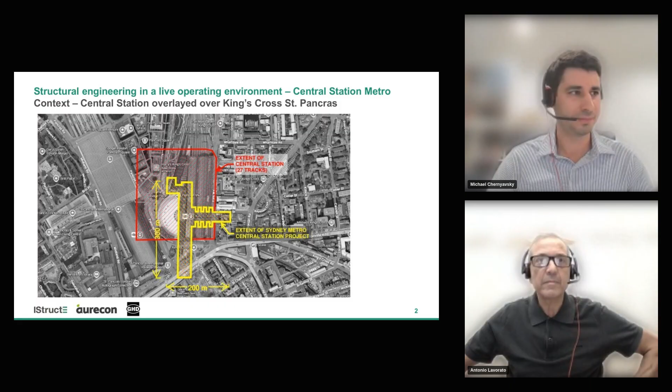We want to step you through some of the background, the challenges, and the process that informed our structural solution. Due to time, we have to limit the presentation to just a few of the many design packages for the various areas of the station. Firstly, an introduction to the heritage Central Station itself, and I'll hand you over to Michael.

Thanks, Tony. Sydney Metro is the largest urban rail infrastructure investment in Australia's history. By 2030, we'll have 4 metro lines, with 46 stations and a 116-kilometre standalone metro rail system. For this project, excavation and structural works needed to be complete in an approximate 2-year timeframe, with quite a long and detailed fit-out, testing and commissioning phase.

Here it is. This is the project. Central Station Metro Works will deliver the most significant upgrade to this station in decades, an integral part of the New South Wales government's Metro City and Southwest project. It had a capital expenditure of about 955 million AUD, which is 500 million Great British pounds. This project was delivered on budget and actually ahead of schedule, which globally is rare for major infrastructure projects, or a bit rarer than it should be.

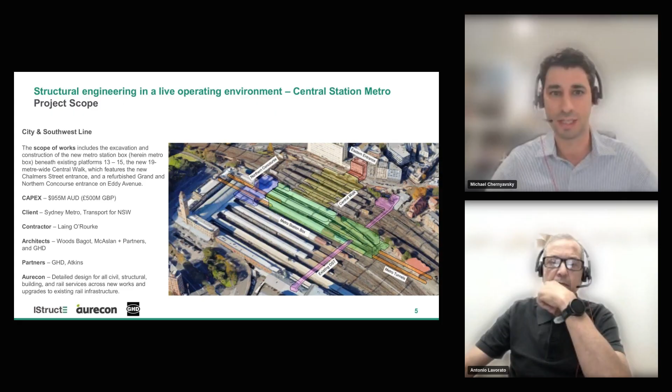As the only underground metro station in Sydney to be erected within a live environment, maintaining operability of the rail interchange at all times during construction, and minimising disruption to the 270,000 daily commuters were the fundamental design drivers here. This was open heart surgery on Sydney Central Station.

Not only was Central Station Australia's busiest railway station, but it's also a landmark. It contained the original Sydney Railway Company grant on which the first station and yards were opened in 1855. The Sydney Terminal building featured in this photograph was built in the early 1900s, with the clock tower added later in the mid-1920s.

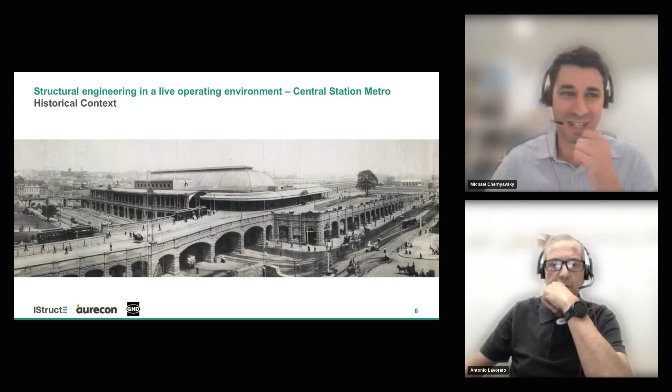So before we dive into the engineering, it's worth remembering that Central isn't a blank canvas. It's 170 years of layered infrastructure, and we're just adding another chapter to this book without stopping the story.

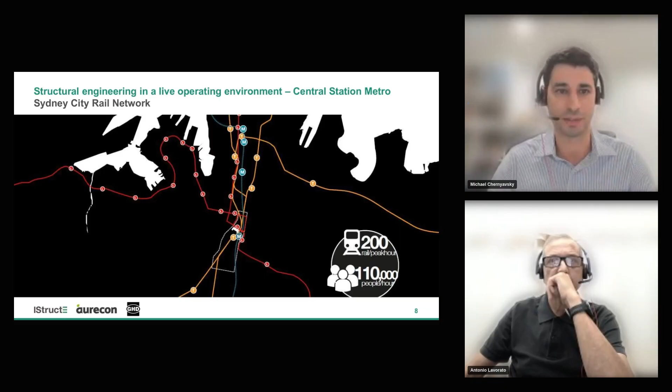Central's a multimodal link of rail transport. It's the convergence of light rail, heavy rail, and now the metro. And it's in the heart of Sydney's central business district. You can see in this photo here, due to the site's constrained inner city location, access was a real challenge. You can see the Harbour Bridge and Opera House at the top of this image.

On Central, constraints weren't the background noise, they were the governing loads for us. So keeping the station operational, celebrating the heritage, the tunnel boring and staging, the logistics, these tight possession windows. Innovation didn't come from removing constraints, it came from aligning around them. Constraints really bred innovation for us.

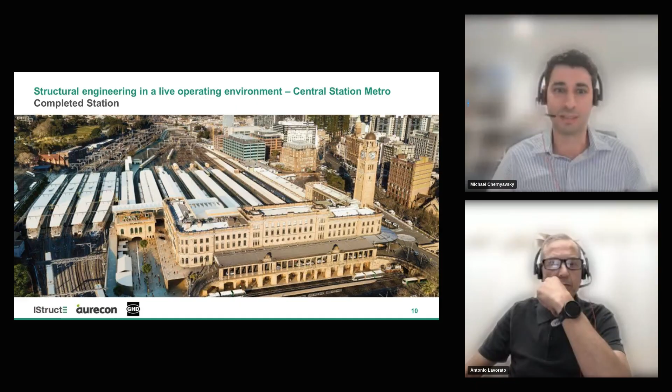As Tony walks you through the structural responses, I'd just like you to think about which constraint was governing each decision and how those constraints actually improved the final solution. So I'll now hand back to Tony. Thank you, Michael.

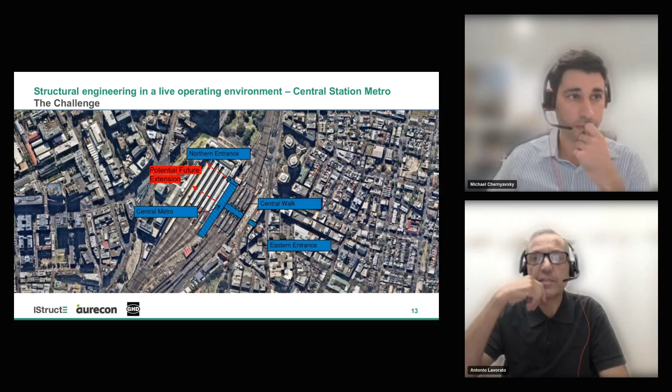When you superimpose, you can see from a constructability point of view that there's no access. There's pretty much no access on all sides.

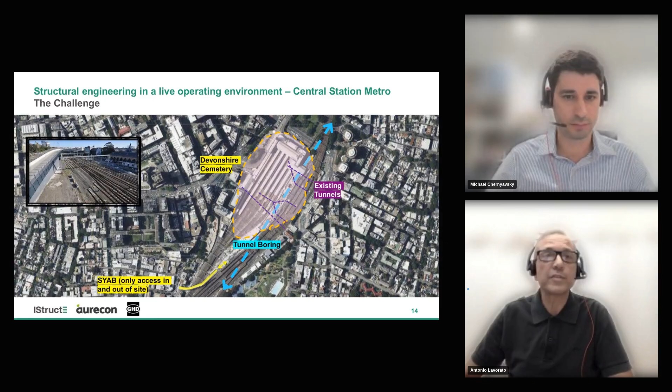As Michael explained, there were 4 main work fronts, and all of them had to be coordinated in terms of access and the ability for everything to be constructed from that one access point.

You can see the actual tunnelling and excavation was one contractor package called the TSE package. There was also a line-wide package, a separate contract let for what we called line-wide, which is basically the fit out of the tunnel.

That's the tracks, the communications, the ventilation, the fire systems of the tunnel. Some of that equipment and some of those control rooms were actually located within the station itself, so there was a great deal of interface between those two contracts.

And then there was the station fit out, which is basically — there were seven metro stations along this particular line, the City and Southwest, Central Station being one of those 7 stations.

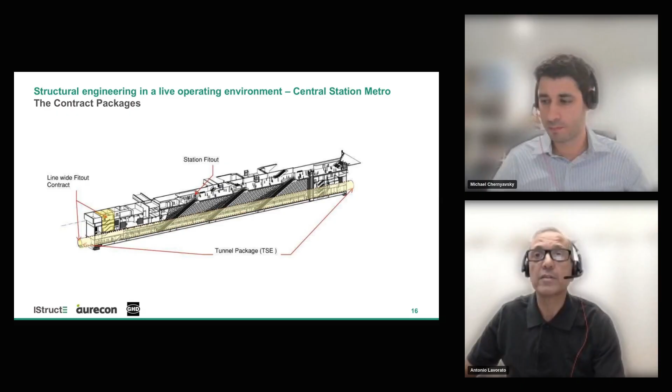The tunnelling package was let earlier, but at the end of the day, the tunnel systems, the line-wide, and station fit-out were concurrent projects. They were all operating at the same time, and there was a huge amount of interface required.

It's important to understand some of the constraints around the geotechnical conditions. We fortunately had quite good sandstone underneath this site. The site was overlaid by some fill in pink, and then some residual soils or residual clays underneath it, down to very, very good, very hard sandstone.

One of the things about sandstone, which I'll talk about further in this talk, is it does contain what we call locked-in stresses. So if you excavate Sydney sandstone, it will want to relieve those stresses and tend to move the actual face of the rock excavation.

There was also a vertical inclusion, what we call a dike, which traversed through the centre, perpendicular to the direction of the metro box. It's a 3 or 4 metre wide inclusion in the sandstone, highly weathered material that went very deep, which meant we had to bridge that.

This is an image from our structural model. It's really to give an appreciation of the quantum of the project.

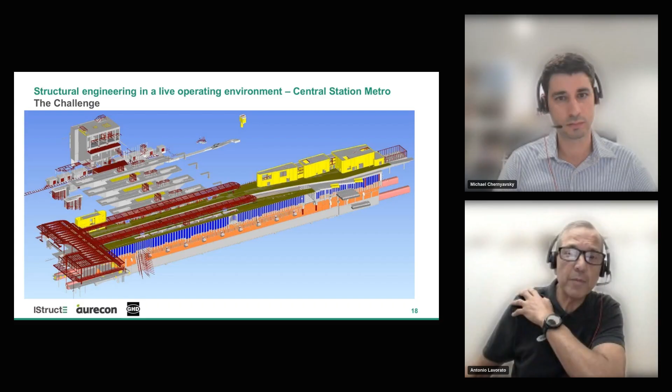So what I've shown here is a section through what's called the reference design. When the government procured this project, it went out to various contractors in a design and construct contract.

They were provided with a reference design, produced by the client's own technical advice team, to give an indication of what they feel would work. Contractors could either price that as their methodology or were encouraged to come up with an alternative.

One of the things that's probably very important to appreciate is some of the timing constraints. Our consortium, Laing O'Rourke, was awarded the contract, but we weren't allowed to excavate below that red line there, which is RL 3.655.

The reason being is that the tunnelling contractor was still tunnelling underneath there. So there was a time delay, and the tunnelling contractor would then extend the tunnel boring machine through to near the actual harbour, where it transferred to a different type of tunnel boring machine.

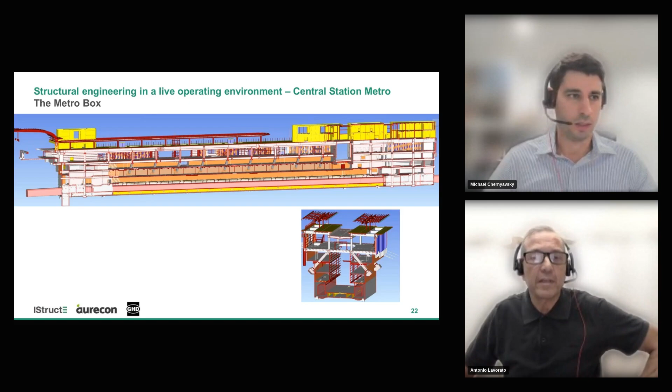As Michael mentioned, in this very collaborative environment, when you're presented with these challenges, you start out with a lot of what-ifs. And I think one of the solutions that we started to look at seriously was: what if we try to support the structure above that RL 3.655 level, to enable us to at least build that top bit and hand over those rooms earlier.

So what it meant was introducing these raking struts and introducing some central columns in the concourse area. The raking struts then came down and were constructed above that RL 3.655. So what it meant is that they could basically start straight away and decouple that long excavation process and the construction of the metro box from this type of program.

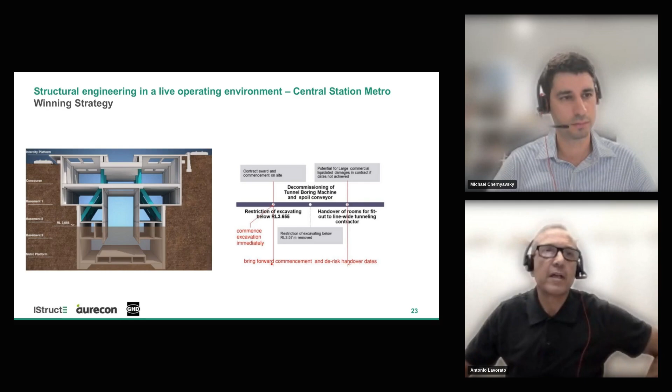We were also able to step that upper platform level, the intercity platform level, to make it three-span, and we were able to raise the level of the main concourse. So you can see we increased the ceiling height by at least 1.5 metres.

We're able to bring natural light in now, all the way filtered natural light, because we were able to put a lot of skylights up on that level. And we're able to bring filtered light now all the way down to the metro box level. Reducing the quantity and program had enormous benefits from a sustainability point of view.

So the client loved it. Our architectural colleagues loved it.

So in the tender offering, and these are some comparative photos, we presented this design to say here's an alternative. The images on the two top slides were presented as part of the tender response to say here's what we can achieve, and the photos below are the actual photos taken not long ago.

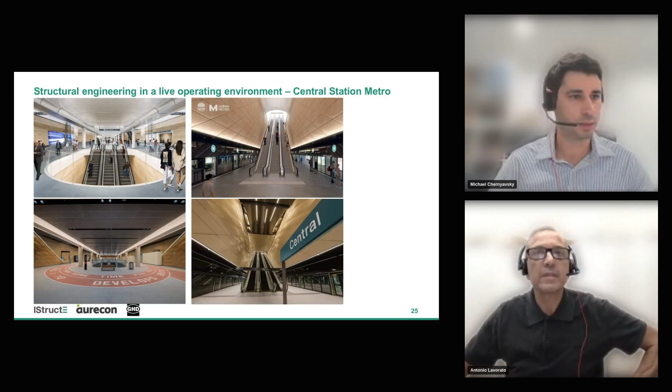Given the solution was accepted, we needed to work out how on earth you put in raking struts in a top-down construction method. This was the real challenge, amongst others.

I've stepped through a series of four slides to show you a timeline of how it was constructed. You can see stage 1.

Traditionally in top-down construction, you put plunge columns down, so you construct the columns. You put steel structures down that eventually get concrete encased. The steel columns provide the temporary support for the first intercity track and platform slabs.

So stage 2, the intercity track and platform slabs were constructed. Again, remembering this is all coming from the Sydney Yard Access Bridge. The trucks had to come in and out all through that one bridge and along the 250 metre long metro box.

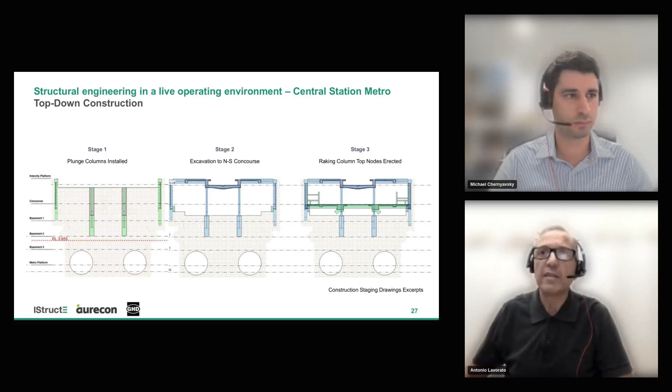Then stage 3 is the construction of what's called the main metro concourse level. Stage 4 was the excavation down to the RL 3.655 level, and you can see we left a pillar of rock in the centre where the plunge columns were still embedded.

Then stage 5, we installed the foundations and the raking struts. Stage 6 - but between stage 5 and stage 6 there's a very important stage, the jacking process, where at the base of those columns there was a series of hydraulic jacks. We jacked, and I'll talk about that a little later on.

We jacked the structure up and then removed the plunge columns. Then we started to construct some of those basement levels, which contained a lot of the back of house plant and equipment rooms. You can see in yellow in the middle, those rooms had to be handed over to the line-wide contractor.

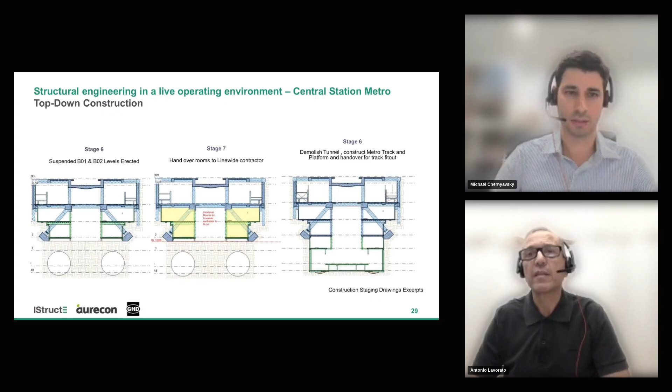Then as soon as we were at the point at which the tunnel boring machines were decommissioned and handed over from the TSE contractor to Laing O'Rourke, they could excavate down to the metro platform level and metro track level and construct the remaining basement levels. By the way, those three bottom levels are actually suspended and hung from the concourse levels.

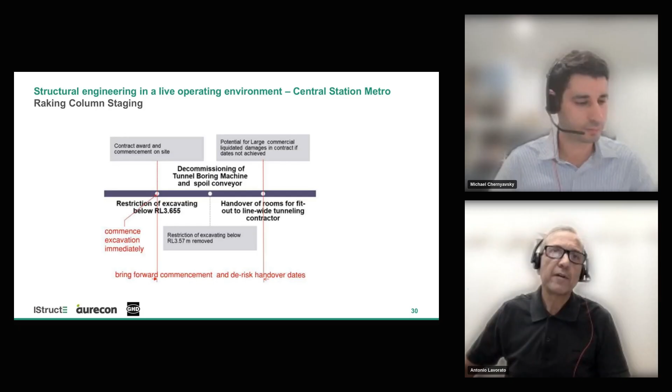So if we revisit the program, you can see our solution enabled the contractors to start early and hand over those rooms to the line-wide contractor, basically decoupling the program from the very high risk program constraint, with the byproduct being a much better architectural solution. If I then quickly want to go through the actual raking columns and how they were installed and jacked.

I'll pause for a minute and explain the reason why we wanted to jack or hydraulically jack these columns. The concourse level at the top there was suspended on rock, suspended across and supported on the temporary strut columns, the temporary plunge columns.

When we constructed the actual struts, they were cast in situ concrete. They tended to shrink away a bit, so we were left with a gap at the bottom. We also wanted to make sure there was a full load transfer before we removed the plunge columns, to avoid any sudden movement at the load transfer.

So what we did is put at the base of the column, shown in red, a couple of hydraulic jacks within a steel shoe environment, where the jacks could be slid in and jacked up. There was a whole series of cells that were then grouted, and when the grout went off we were able to remove the jacks and do a subsequent grouting. The staging in the grouting had to do with the point of load transfer.

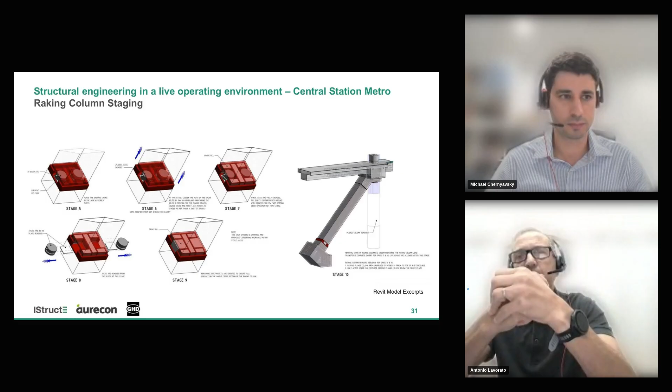So this jacking operation was done at night. As I said, construction activity stopped, but by the next day they were able to continue. You can see the sequence there in a bit more detail.

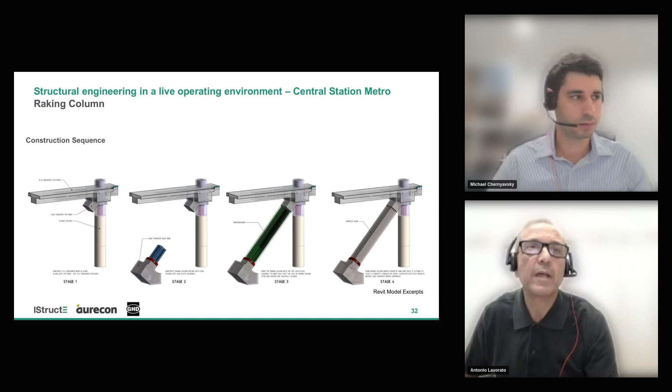Now you can see on the left the actual plunge column with the construction of the strut with the reinforcement in place. With the cast in situ solution, we had a plate that was cast in at the top of the node. We had reinforcing bars threaded into that to have continuous operation, continuous design load transfer.

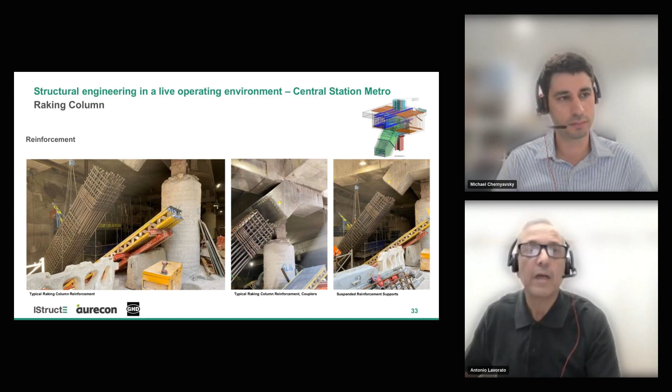Again, this is the raking column with the formwork, and the typical formwork, which was, as I said, the frames were done in sequence. So there was 18 grids. These were constructed in sequence, and then the excavation could follow that in sequence.

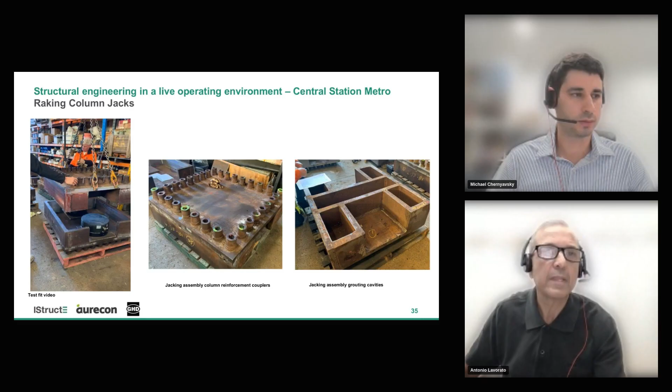You can see now the photo of the plunge column still in place with the raking column, and that node at the top where the plunge column went through. We had the reinforcement and stressing for the concourse level in both directions, and then that very heavy reinforcement for the column. All that had to be coordinated, and the contractor actually did a trial mock-up of this in a warehouse somewhere to make sure everything fitted before they tried it on site.

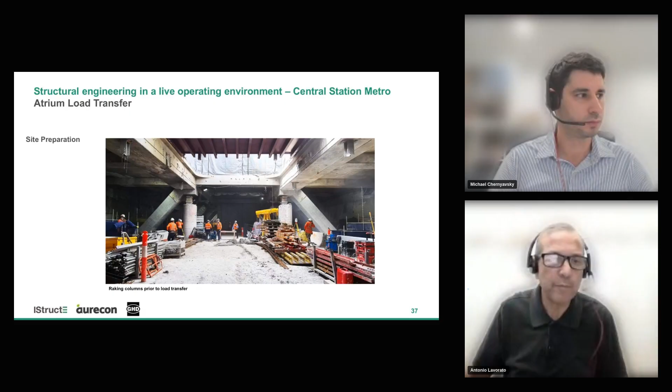So this is the arrangement just prior to the jacking. The struts in place, the plunge columns. You can see the concrete encased, but at the top of the plunge columns you can see the steel from the original steel plunge columns, and at the underside of that node we had two plates bolted, so we could unbolt those when we went through the jacking process.

So again, just a summary of the actual jacking load transfer, what we call the atrium load transfer. The process was we decided to prop one grid at a time. These grids were at 15 metre centres. We decided to sequentially start at one end of the box, the northern end, and put the jacking process through to the south.

So the process was: on the night we basically did an inspection of the whole deck to make sure there wasn't any load that we hadn't accounted for. We loosened the bolts at the underside of the plunge columns, at the interface of the plunge columns to the underside of the concourse level, and we then did the actual stage jacking.

The actual jacking was done in stages - 20%, 30%, 50%, 75%. We reviewed the data at each stage. We stopped, reviewed the data. We then had survey markings to make sure there wasn't any movement that we weren't expecting. And then we basically grouted, cut the plunge columns, and handed that particular grid over to the contractor.

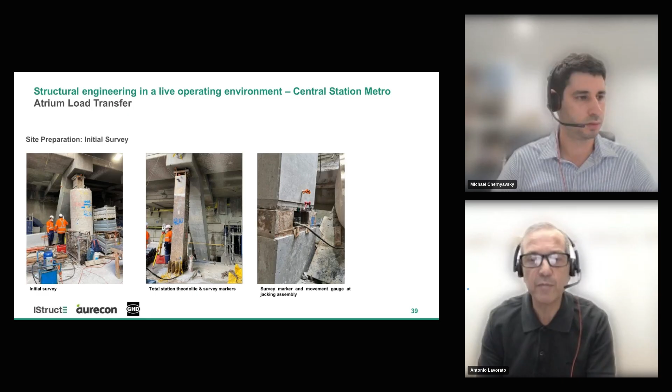Unbolting of the bolts prior to jacking, and we were ready to do the load transfer on that raking column.

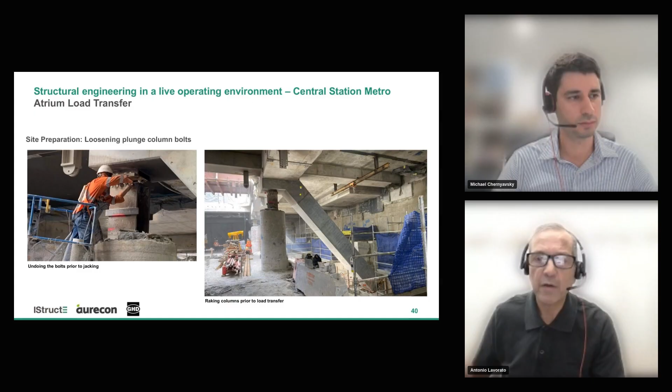That photo on the left was taken on the first grid. There's quite a lot of people there. There were 18 grids, so the first one drew a lot of attention. By the last grid, there were probably only 2 or 3 of us down there, but at the first one there was quite a lot of interested parties to observe it.

Again, you can see the plunge column in the center, and a close-up of that plunge column with the top connection. Interestingly, we had all the survey markings, and we actually put strain gauges on the foundation system as well to make sure that load was coming concentrically onto that foundation. So we had a great deal of sophisticated measurements.

During that whole process, I took the old school approach. I stood there with a pair of binoculars, looking for that gap between the connection plates, because I think sometimes you can have all the data, but you really need that physical telltale that the load had been transferred. I was just trying to observe, and we did see on most of them a small gap between the connection plates, which told me that the load had been transferred.

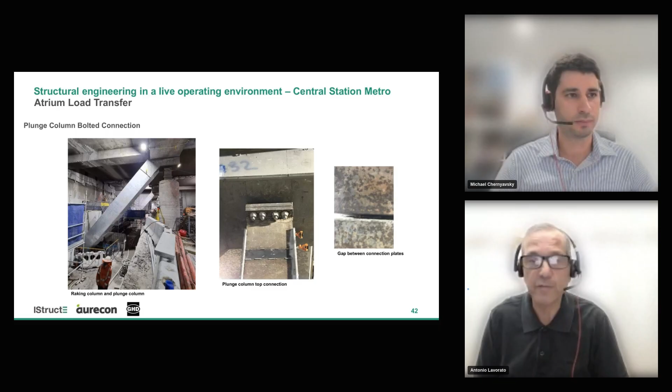Once that occurred, they demolished the top of the plunge column. They cut the plunge column away, and you can see the plunge columns being removed, and then the system operating as a full strut and tie system - vertical load coming down the strut in compression, and that concourse member also acting as a tie member in tension as well.

This is some images of what it looked like when we started to do some more detailed excavation. You can see in the center photo the base of these struts, basically the underside of that, at level 3.655. This is the point at which it was handed over so they could start excavating down below that level and start constructing some of the hanging elements for those lower basement levels.

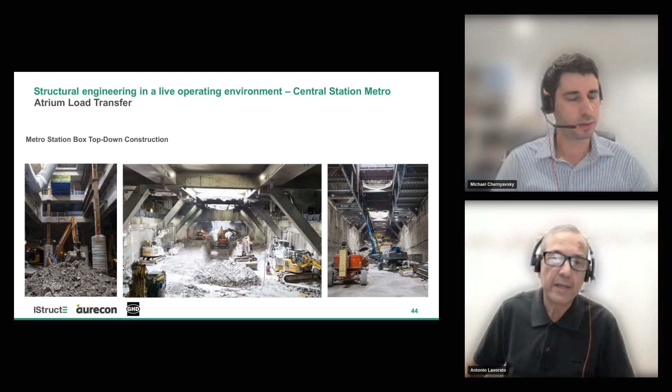You can see the section on the right-hand side, and on the left-hand side a lot of the struts now starting to be hidden behind the plant room levels. So when you walk down there now, you actually can't see any of this - it's hidden below, well, behind the main metro station.

Some more images of the operating environment that occurred. All the excavation that occurred below had to be lifted out through the mole holes up into the top deck with trucks, then taken out over the Sydney Yard access bridge. You can see that operation occurred throughout the whole process.

Continuously, and you can see that photo on the right hand side. I think that clamshell crane was actually purposely built for this particular project, removing the spoil up from these mole holes through the raking struts, through the concourse level up to the intercity platform level. Just bearing in mind in terms of program, at this point here with the original scheme, they probably would have been just excavating down from the top at a similar stage in the project.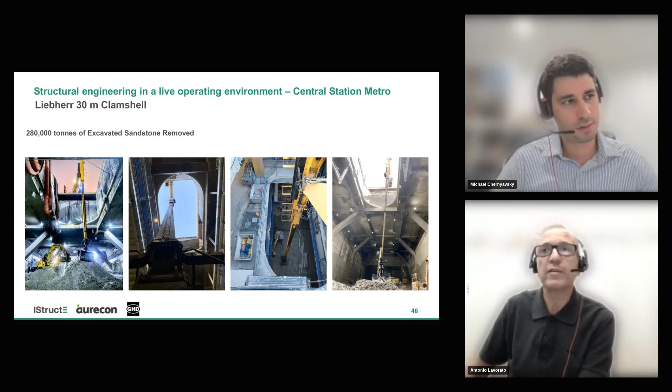So I think now I just want to hand you over to Michael. We've got a video that...

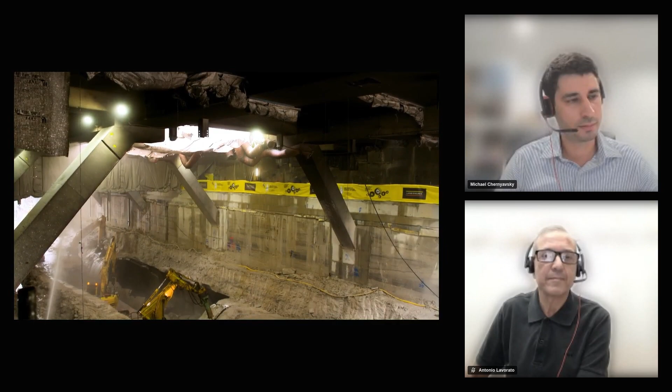So Tony mentioned, but basically this solution saved 9 months on the program, and that's not just 9 months on this aspect of the program - that's the critical path program saving 9 months. So there's a simple solution structurally, but actually with a big impact on the project.

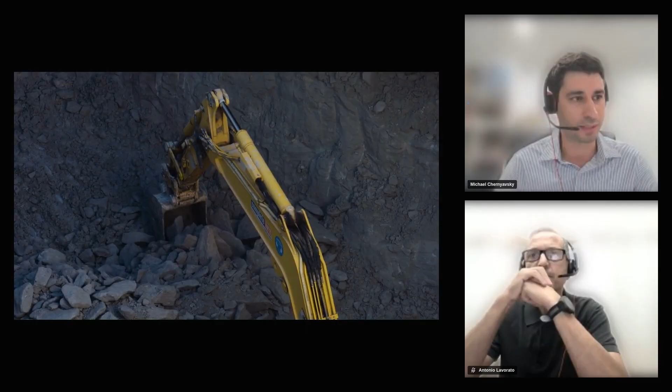So you can see here as excavations going down, you saw the tunnel linings being broken out because they line the machine as the tunnel boring machine goes through.

Like Tony mentioned, 280,000 tons, which is about 100 Olympic-sized swimming pools of material pulled out from these mole holes in 2-meter cube batches with this clamshell. I think it was a Liebherr 30-meter clamshell.

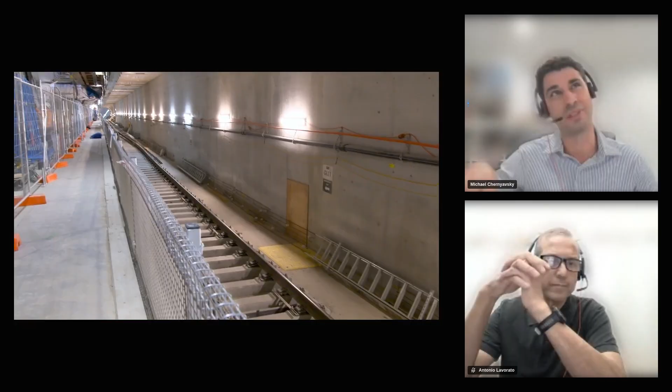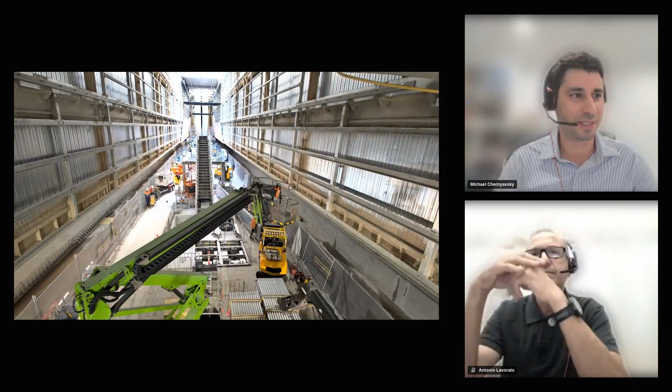And here you can see that's the metro line once it's built - nice views of the tunnel leading out. And the hanging steel there on the left and right of the image, I think there's about 400 tons or so of hanging steel that all hang back up at that concourse level. So it's a fair bit of material going through there.

One of the other challenges we had, probably the biggest technical challenge, was how do you do a top-down construction in this rock with the stress relief? One of the main issues we had was the size of these plunge columns. In order to reduce their size, we utilised the lateral restraint provided by the concourse level, or the levels going down, so that as we excavated down to reduce the effective length of the plunge column, we used the concourse level to strut and provide lateral restraint, which meant that restraint had to go somewhere, and it went to the sides.

So we had it constructed hard up against the rock on the side to make sure that if it wanted to buckle, it was restrained. Now the problem we had is that when you excavate in Sydney sandstone, you get stress relief.

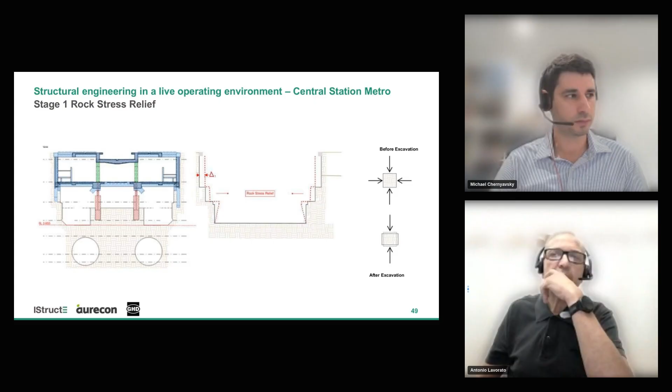So we've got that concourse level that's used - not the top level, but the second level down - providing lateral restraint to those plunge columns. But at the same time, as we excavate, you're getting that delta coming down. So the solution - and then we had a further complication because we had two stages.

In the first stage we had delta 1, so the rock moved in, and then we had the second stage excavation. We had delta 2, the bottom bit came in, and it dragged the top bit as well. So at the top we had delta 1 plus delta 2, and at the bottom we had delta 1. So how do we accommodate this?

We want to strut to the rock, but if it comes in 20 or 30 millimetres, we would have crushed the concourse level. So the solution we adopted was to install, at each grid point, the whole concourse level constructed with a 20 millimetre gap to the side rock, with the exception of the actual main beam, which formed the top strut of that strut and tie structure.

And what we did at that point is we put hydraulic jacks in. The purpose of the hydraulic jacks is that we put a load - we put oil in the cylinder and push the jack up against the rock. But working with the jack suppliers and installers, we managed to set a predetermined limit.

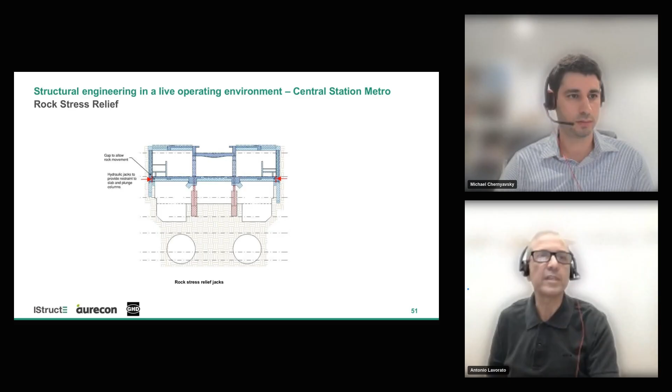All this movement was monitored with real-time monitoring. Myself and our lead geotechnical engineer would get text messages to say something had happened, so we could then address it and make the decision of when to put the jacks back in place.

So I want to now hand you over to Michael, who is going to talk a little bit about another main area, which is the northern concourse entrance.

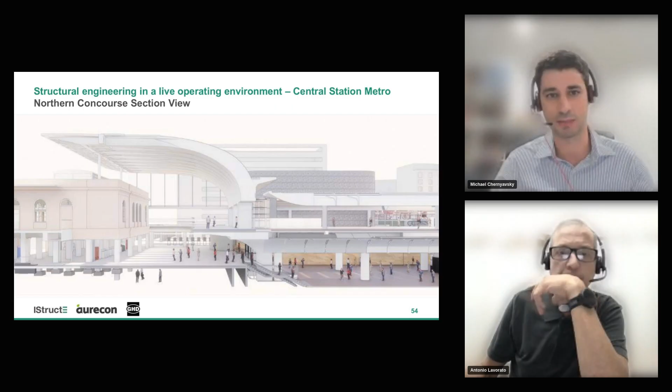27 meters below ground on the longest escalators in the southern hemisphere, which is cool. So it's one of the busiest confluence points in the station, and the architectural aspiration was to respect and celebrate the surrounding heritage and create a really light-filled and grand and intuitive space.

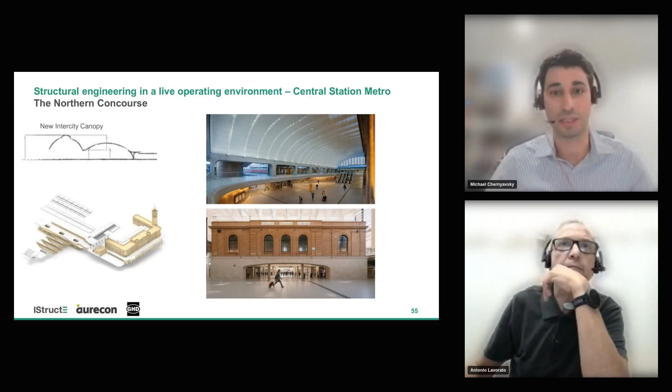So you can see the references on the left-hand side. It met the functional requirements for a pedestrian connection through the station and a thoroughfare.

However, the design limited the aspirational performance of the lower concourse, as it obscured some of the view of the roof as you go up, and it reduced some of the natural light and the opportunity for natural light to get through. It also had an underlying column grid, which made the space a little more cluttered.

So our intended design proposed a cantilevered intercity concourse, pulling that concourse back to express the heritage building and achieve a column-free zone underneath, bringing light all the way into that part of the station.

The left image isn't a flattering image of the reference design, but you can see here a bit of the difference in trying to create this really grand entrance.

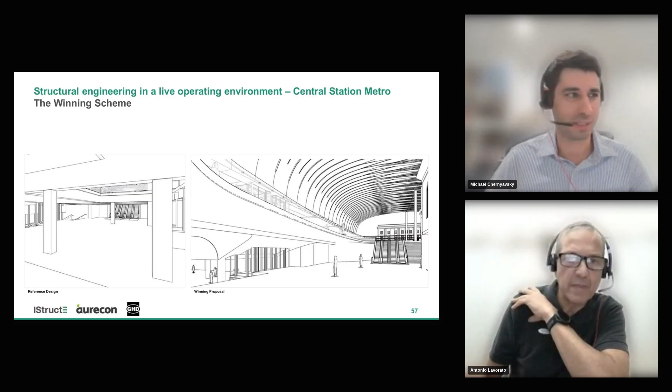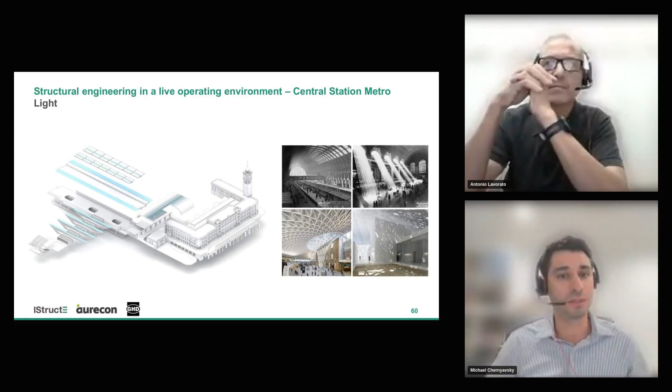Just to quickly touch back, natural light is maximized in the subterranean areas, helping with orientation and intuitive wayfinding through the station.

So the northern concourse canopy is approximately 40 meters wide, 80 meters long, 12 meters high. It's a 330 ton propped cantilever steel structure with curved aluminium cladding and 21 large kite-shaped skylights at regular spacings.

So the intent was clear. It's not just weather protection. It's designed to really create an iconic front door to a world-class metro. Central was to become a destination in its own right, not just a place that people pass through, but a place people stop and pause.

So we spent a lot of time listening. The brief was clear: we needed to create an iconic front door to the station. The roof interfaced directly with multiple heritage structures. It supported some of them, it straddled others. We needed to also reticulate two full cable trays of services from these heritage buildings and other parts of the station through the roof down into the metro box, linking in.

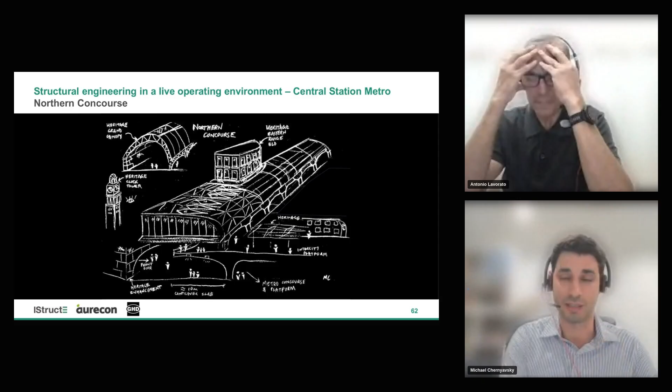And we needed to allow for future expansion of this structure into the future. And we had to align with irregular platforms, platforms 8 to 13, and yet create this regular skylight space.

In creating a space that really was disconnected prior to this project, so we felt we understood the architectural intent and the services constraints.

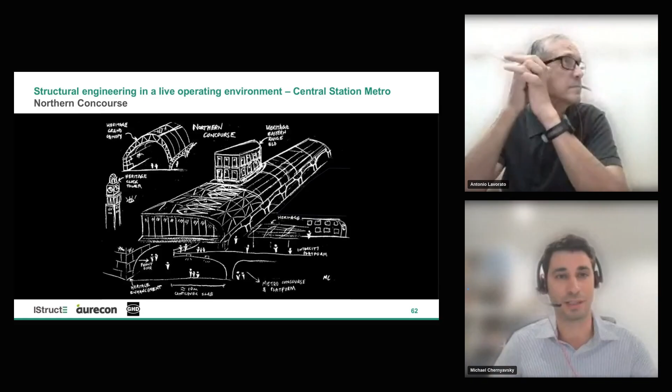Then constructability entered the room. So feedback from the builder, fabricator, riggers was clear: a stick build solution here would take 4 months. We knew a stick build solution wouldn't work, but it was great getting that feedback.

The station had to remain fully operational, so site time had to be minimized. Temporary works were reduced because we couldn't leave anything that obstructed commuters in the morning. So we did a lot of the work in night possessions, these 4-hour windows, which when you count startup time and handover time, is probably a 3-hour window to actually work. Logistics and craneage limits became critical here. The structure didn't just need to work, it needed to work fast.

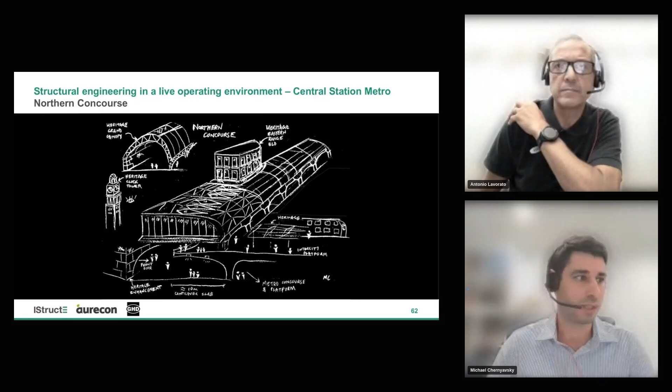So on site, to make it fast, we simplified all the connections. Each panel had just 4 simple connections of 2 to 4 bolts. Through modularizing and prefabricating these into stable elements, it was probably an extra 20% on tonnage, but those benefits in time on site were really what made this solution optimal for this project. At each stage, it needed to be stable so you could hand it over in the morning and commuters could walk through.

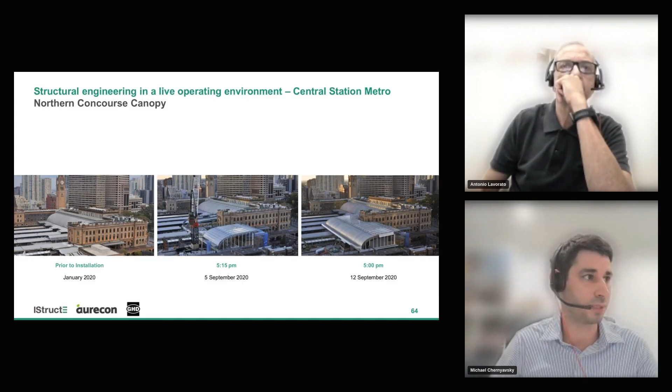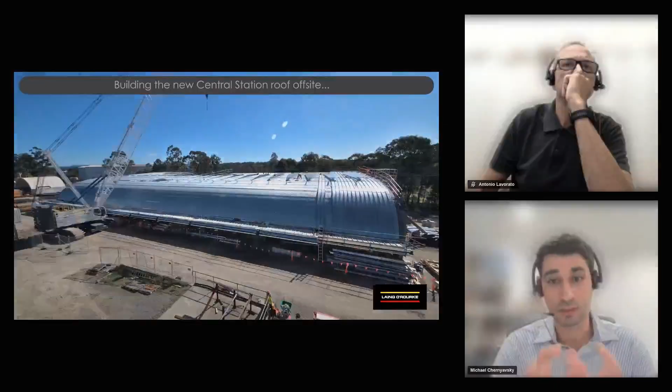Here you can also see a quick time lapse. It was fabricated locally, in Kurri Kurri, about an hour and a half from the project. We did a full-scale pre-assembly in the fabricator's yard to make sure everything fits like clockwork, and really to test whether it could be built in the 4-week period we had of just these night possessions primarily. So this time lapse shows how modular construction can be adopted at scale here.

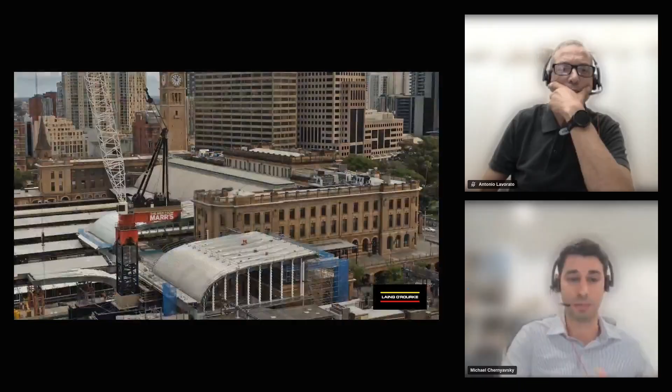I think the interesting thing is you want to get tolerances right. Tolerances are very interesting. You don't want too much, or the structure can start to build out of position because you've got too much play in the connections. So you want the right amount that lets you have that adjustability but still keeps the structure in place. And basically, the builder said this went together like Lego, and that's one of the greatest compliments I've had as a structural engineer.

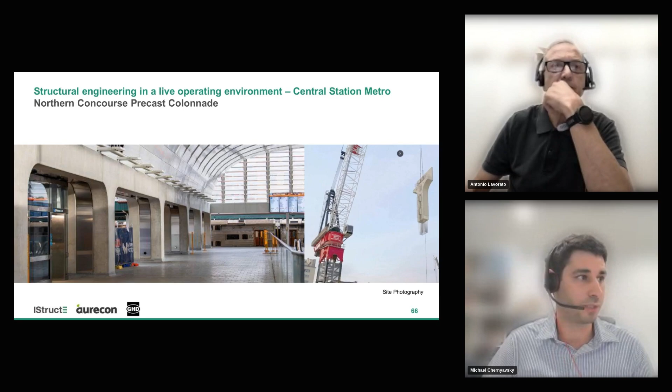It's a really good concrete finish. Tony, would you be able to click next? Thank you.

So it was a precast in-situ stitch system. It had to behave monolithically because it takes the moments from the cantilever roof, or the propped cantilever roof, and keeping it monolithic improves efficiency. Really, as with most precast and prefabrication, it's governed by how big an element you can lift, transport, and install. So you really want to limit it, and that's what governed the size of these modules.

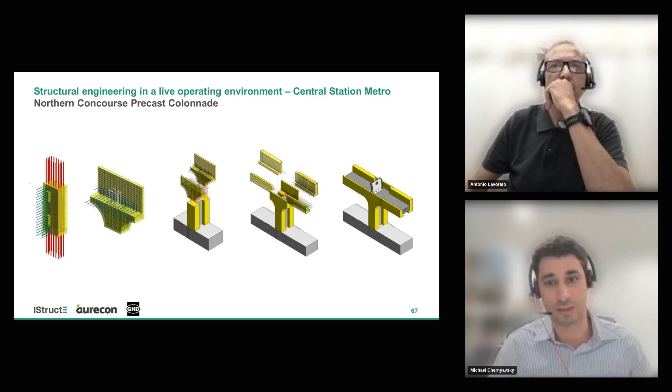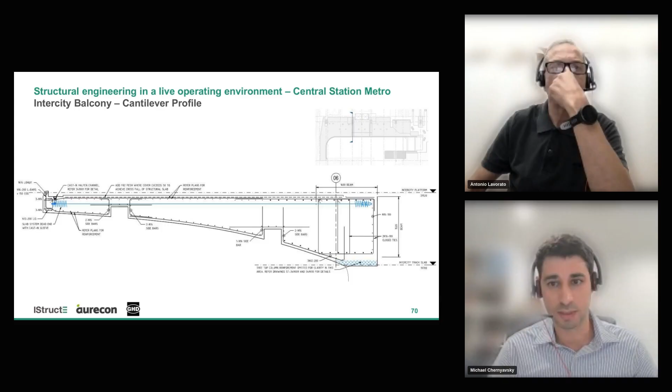So you can see this is just the main confluence point and link into the metro. This is a section through that 10-meter cantilever. You can see we've got these services channels in the bottom of the soffit. And we really worked to rationalize the geometry because it started with a lot of double curvature, and we tried to limit it to single curvature as much as we could so that it could reuse aspects of the formwork.

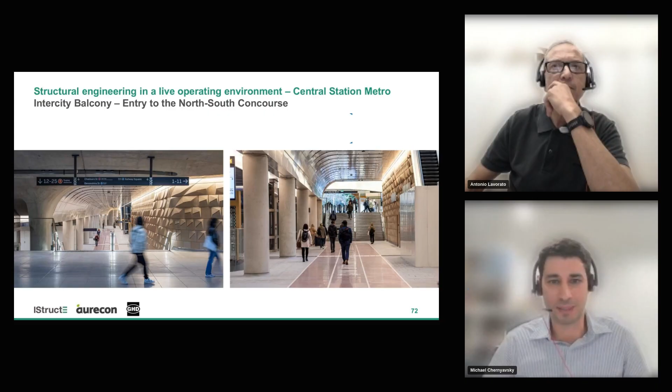And we often hear, as a structural engineer, architects and others sometimes say that you just size beams and slabs - that's your job. And yes, that is our job, that's true. But on projects like this, the structural engineering becomes a link between architecture, procurement and construction. And we can be the discipline that really turns aspiration into something buildable.

It's a little hard to see here, but that's a before and after of that part of the station. So it has really changed.

On a personal note, this project is very close to my heart because every day for university I went through this station. I remember the first day I went through the station, I stopped in my tracks to admire this structure here, which is just adjacent to the new roof. I sketched it out, and I even got to uni late that day. Then some 15 years later, I remember watching a commuter stop, take a photo of the roof and discuss with their friend some of the things that may be happening behind the scenes on this project. It was a real special and proud moment. I hope everyone listening has a moment like that.

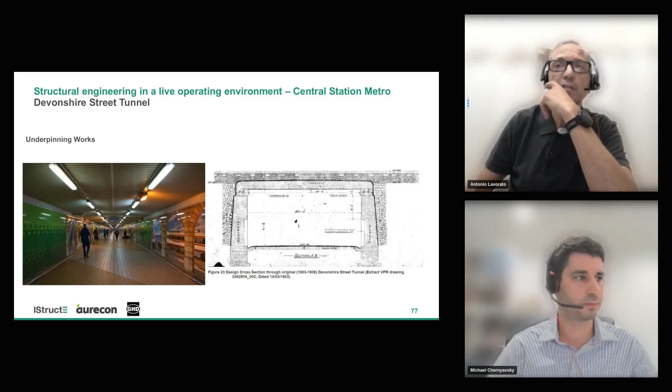But what was really interesting, and concerning to us, is what was under the tunnel, which I call the umbilical cord between the west and eastern side of Central Station. You have the main 1500 diameter stormwater line, the main 400 millimeter diameter old clay pipe sewer pipe, and then Ausgrid, our energy supplier. So the main power that went east to west all came under this tunnel.

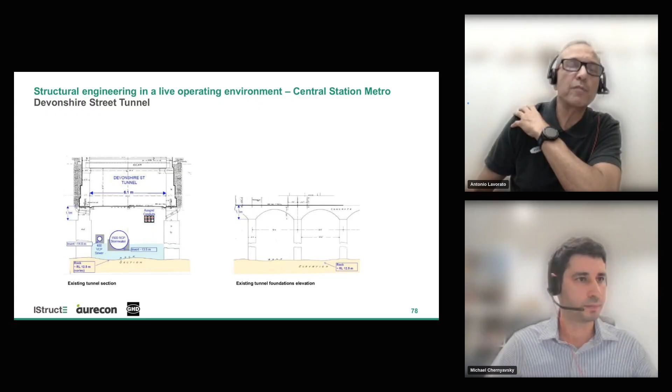So we took the view that if we could come up with a way of not excavating this, we would remove an enormous risk of damaging any of these services. So what we wanted to do, as you can see probably on the left-hand side, is whatever we needed to do to that tunnel, we needed to span across because the actual metro box went underneath it.

So the solution we came up with, which you can see on the right-hand side, is to actually underpin this tunnel, get down to the rock level, put some horizontal bores in there, and basically cup the tunnel. So what we did is we did not disturb the area underneath the Devonshire Street tunnel at all, where those services were, nor did we disturb the actual tunnel itself, so people could operate.

So we didn't go with the shutdown. What we did is, as we were excavating down, remember those various excavation stages we had, we would pour. The first thing we did was a whole series of secant pile walls that held the material temporarily.

One thing I've got to say is this was constructed using a cut and cover method back in the early 1900s. It was open, cut and cover. It was then constructed, and backfilled with basically sand.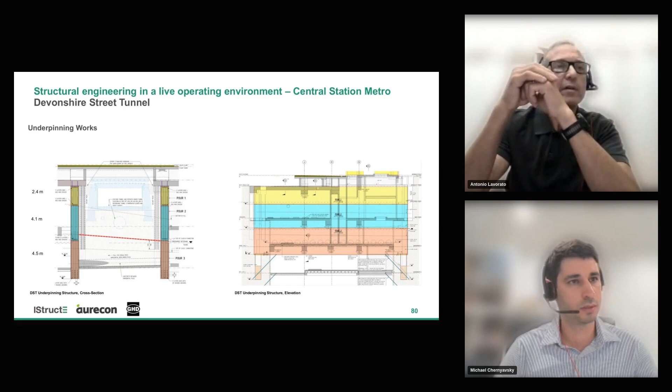So not only does it contain all these services, but from a hydrogeological point of view, it's a main point where in-ground water goes from west to east or east to west, depending on the main gradient. So it was very heavily water-charged ground as well. Again, we didn't want to disturb it, so we went down in stages.

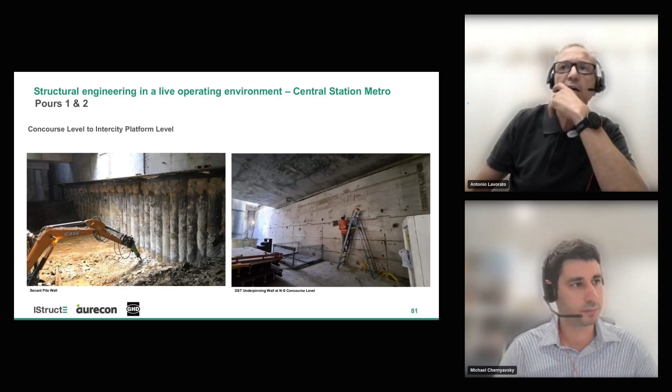And then you can start to see - those are the secant pile walls on the left-hand side. On the right-hand side you can see the underpinning walls that we came down. They were vertically, conventionally reinforced vertically, and we had stress bars horizontally. You can see that castellation of the interface to make sure the shear transferred adequately across that, and the horizontal boring done in that class 2 sandstone, very good competent sandstone.

They were poured, and then the final level came down. These horizontal bored piers, or horizontal circular beams - you can see the reinforcement came out - were then tied into this wall. And on the right-hand side, the finished product. Up the top, just above the boom of that excavator in the distance, you can see the Devonshire Street tunnel that traversed the site.

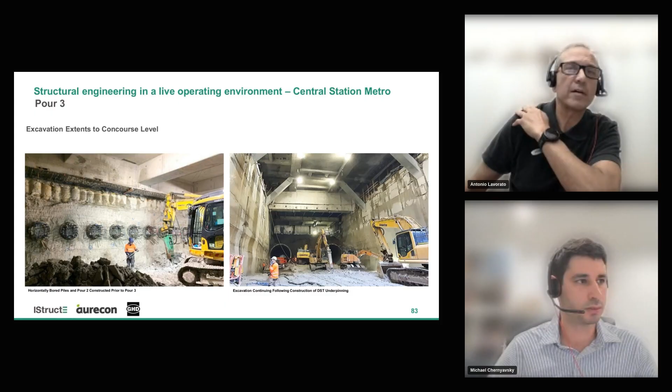So that whole operation was done while we kept that tunnel operating. People walking through that tunnel night and day probably had no idea what was going on underneath. Probably the main thing we kept operational is all those critical services infrastructure, which we kept damage-free and operational.

I just want to go back to this photo that Michael presented. I started the discussion by saying that it's rare that a structural solution has such an impact on the way people interface with the building. On the left-hand side and the right-hand side, it's pretty much the same view.

You're looking on the left-hand side from the northern concourse, you've got the cantilever slab above, you've got that magnificent roof over the top of you, and you're looking down into the metro concourse level. From that level you take the escalator all the way down to the metro box. What you can see there is clear sight lines.

At the base of that, where that arch springs from the top of those circular columns, imagine if the reference design had horizontal beams at that level - you couldn't see down there. Similarly, on the right-hand side, try to imagine those beams coming across at that springing point of the arch. That's a great view all the way through the northern concourse, through the central electrical building, out to the entrance of the station.

That clear sight line was a wonderful thing to achieve, and was achieved by our structural solution and the architectural treatment of that solution.

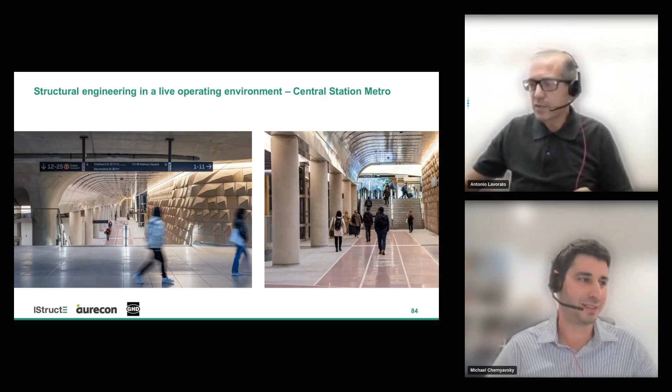I'm just looking at the time, and we've probably got a few minutes left. There are some areas we want to quickly touch on, some of the other work packages we mentioned initially. I'll quickly hand you over to Michael to conclude on that.

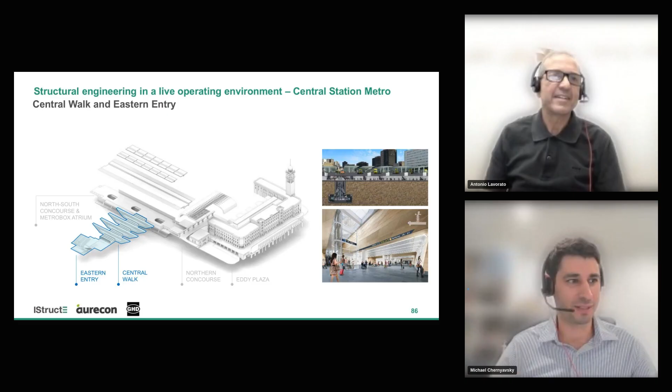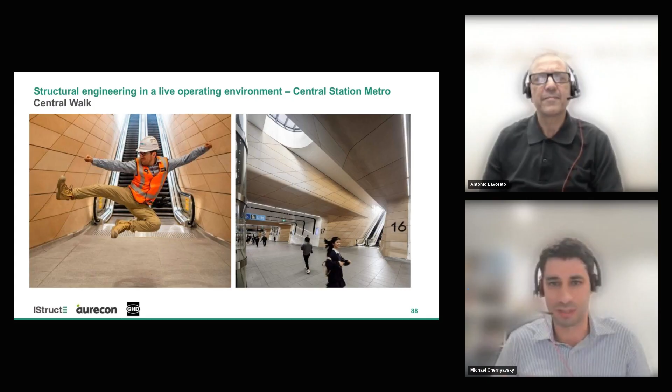Central Walk was opened in 2022. The project officially opened in 2024 in terms of the metro running, but this station was actually completed early. Central Walk opened two years earlier because it provided benefits, linking the whole station even before the metro was open. So as soon as something was ready on this project, we opened it and gave it to the commuters.

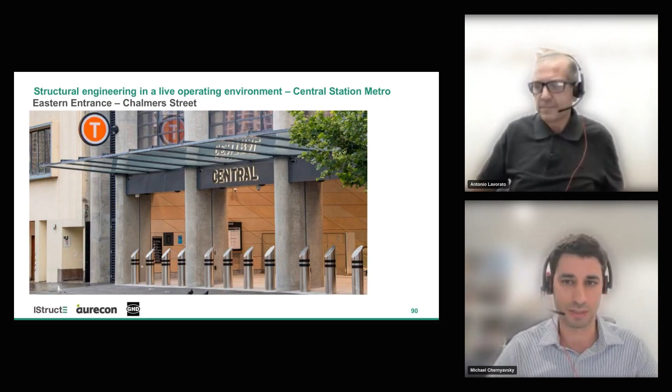And here's the eastern entrance. This is basically a new connection through to Surry Hills, a busy part of the station, so you don't have to cross the road anymore in this busy light rail interchange. It was post-tensioned, reinforced concrete generally, and about 19,000 tons of material were removed to excavate for this entrance—that's 6 Olympic swimming pools.

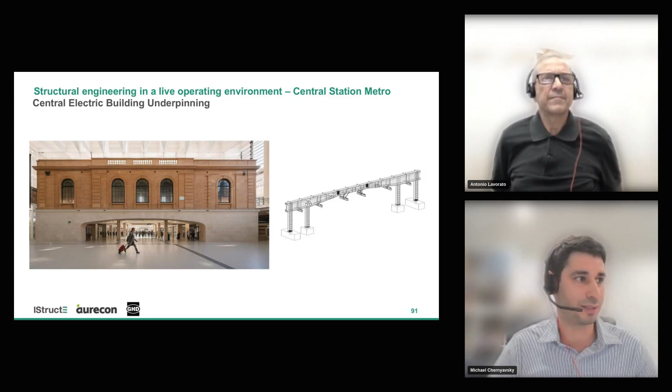I'll just end on a video, which is basically Central Station in 60 seconds. I feel this project shows that structural engineering can exist within a sustainable, livable, resilient infrastructure environment.

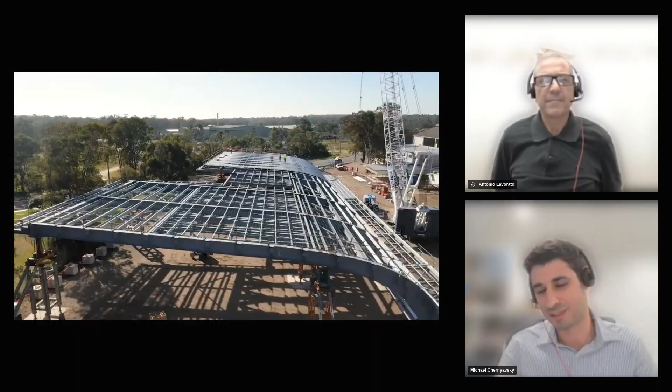I'm just going to give some fun facts while I've got 40 seconds left. The project achieved a 6-star Green Star rating, the highest possible rating, characterizing world leadership in environmental sustainability, design and construction, as well as operation.

This was due to a 38% reduction in concrete versus the reference design—that's a 32,000 ton saving. The heaviest land animal in the world is the African elephant, so we saved the equivalent of 8,000 African elephants in concrete mass.

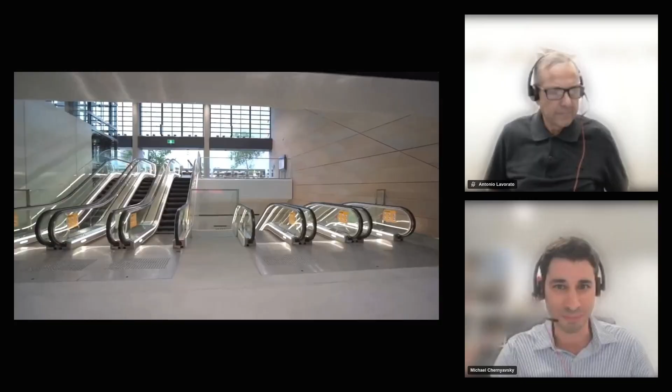Of the concrete we did use, 51% supplementary cementitious material replacement was achieved through fly ash and slag. There was a total of 373,000 tons of sandstone excavated via 11,000 truck movements. 320,000 tons of that were used on other projects within Sydney, like Barangaroo—that's 100 Olympic swimming pools worth of rock excavated and reused on other projects.

5,500 new jobs were generated. Tony and I are grateful for, of course, being 2 of those. Not really a fun fact, but this was a really incredible team from all subconsultants and subcontractors—it's a dream to work on this project.

We now have 98% of Sydney trains running through Central Station, and 2 new metro lines running approximately every 5 minutes. I'll now hand back to Matt for Q&A.